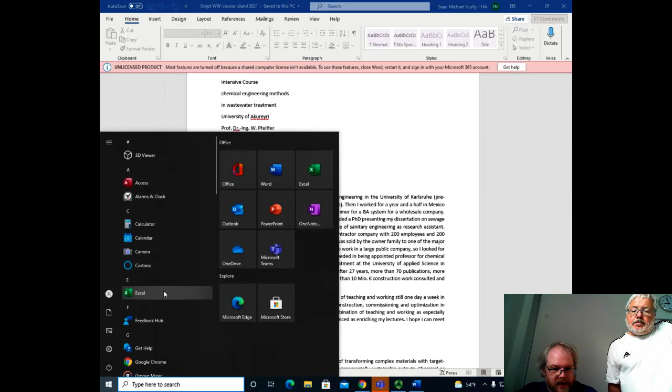There's no X on this one. There should be, yes. Okay, good. Wait, I did set the screen capture. Okay, yeah, excellent.

Good, so same deal as yesterday. Something on here, okay, we're gonna see some discussion then. Yeah, 262, it's the nice conference room. Nice, see you later.

No. I thought my computer was frozen. It's not there? No, it's fine. Okay. Whoops.

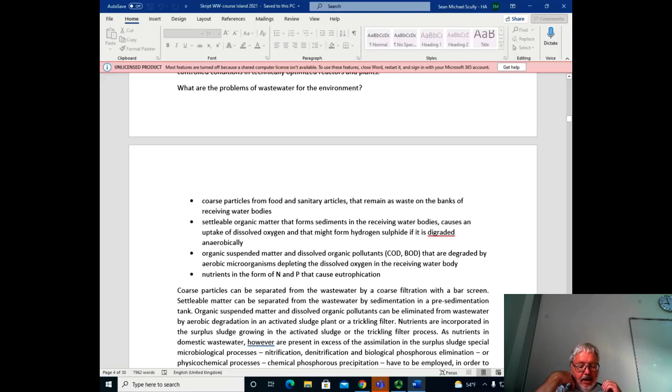Is that sound okay, or do you hear anything? Yeah, I checked the microphone earlier, it had a very good response. Ah okay, should be fine.

Well, do we have anybody with us? I think Celia's coming, and probably one other student coming around 9:30. I'm gonna see if there's anybody here online.

Oh, we got one victim online. Excellent.

So we shall wait some 10, 15 minutes, or? Yeah, maybe at least 5.

Let's check to make sure that this is... could you say something so I can hear, oh wait, I can even hear myself speaking, so it should be fine. Okay, yeah. Hello, hello. Yep, we're good.

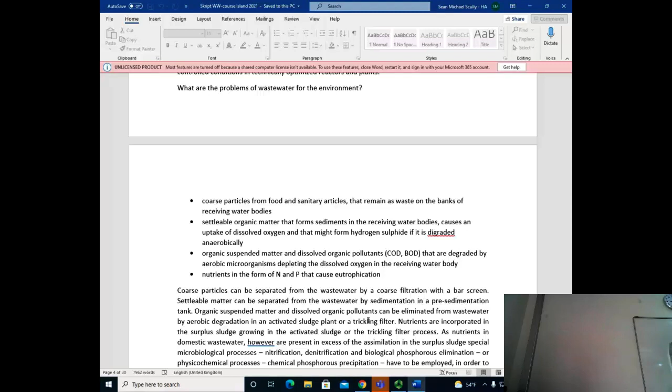Like I told you yesterday, chemical reactions can either be under forced reaction conditions, with high temperatures and pressures, giving all kinds of byproducts, but this biocatalyst human being is also very selective. So he eats food, all kinds of different food, from animals, from vegetables, all different resources, and the output is pretty uniform in quantity and quality.

This is what makes up domestic wastewater. We all wash ourselves, and we almost all use the same detergents. There was a change back in the 80s when we got away from phosphates for complexing the calcium, the hardness in the water. But that's probably the only change in the last 50 years. Everything else stayed the same, and we're all using close products, although we live in very different parts of the world.

Okay, now what is the problem? That was the last question yesterday. What is the problem, or what are the problems, for wastewater for the environment? Why don't you just discharge it?

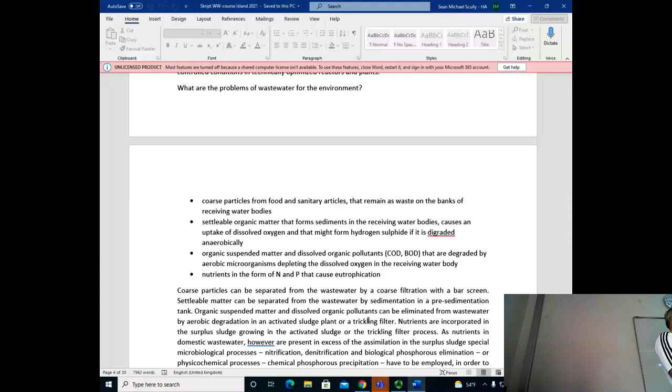I told you about Kaohsiung in Taiwan, a city with 1.5 million people at that time. It has almost doubled to 3 million people now. And at that time, the Love River, you could smell the wastewater. That's what you can do: you can just dump the wastewater in your rivers, and then just stay away from the rivers.

So wastewater treatment is a political decision. Do you want it, or do you don't want it? Because of course you can make drinking water—you can put the money into making dirty water into drinking water, or you can put the money into making wastewater decent, getting the pollution out and having clean rivers, and then it's of course a lot easier to make clean rivers into drinking water. Both options you have; that's a political decision.

Probably, I believe, but nobody has proved it up to now, that treating the wastewater and having clean rivers—besides that you can enjoy the nature, which I estimate as a high value—I think it's probably also more feasible to treat the wastewater and have less effort in producing drinking water.

But in the future, to be honest, this might change a little bit, because when the glaciers in the Himalaya are going to melt down, what are we going to do? There are 3 billion people living from that water.

I can imagine that, for example, in coastal areas they're flushing toilets with salt water. Why don't we use salt water for that? What's the reason to use sweet water for it? Maybe in 20 years, at least in coastal areas, our tap water is not going to be drinking water, it's going to be salt water. And maybe in every household you'll have a small unit of reverse osmosis, producing those 3 liters per person which you use for drinking and cooking, made through desalination. Might be an option, no?

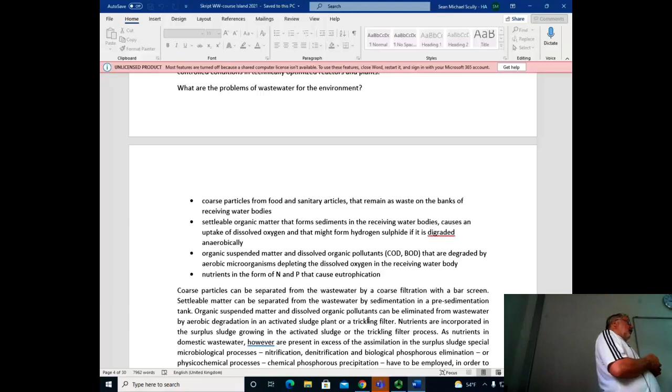Okay, just to tell you: this settled matter has also to be eliminated, because the dissolved oxygen content in the receiving water is really the main parameter we focus on in order to keep the receiving water in a good ecological state. Okay, what else do we have to do?

We have organic suspended and dissolved organic pollutants, which we measure with COD and BOD, because this is what happens when we release those in the receiving water. They will also deplete the dissolved oxygen content when they're degraded by aerobic microorganisms.

And last but not least, we have to deal with the nutrients, nitrogen and phosphate, because in our urine we have urea that will dissociate into ammonia and hydrocarbonate, and that's a source where most of the ammonia comes from. And then also in our feces and in our urine we have some phosphates. These are nutrients, and if those nutrients are in the receiving water and you have sun, you're going to have algae growth.

I mentioned that yesterday also. During the day it's fantastic because when you have algae growth, that means photosynthesis, so you produce oxygen, you will have oxygen saturation. But at night, when the sun is gone, these algae will be degraded by microorganisms, and then you will have respiration, and the dissolved oxygen content will be depleted, and your fishes will die during the night, and unfortunately they will not revive during the day. Because once dead is always dead.

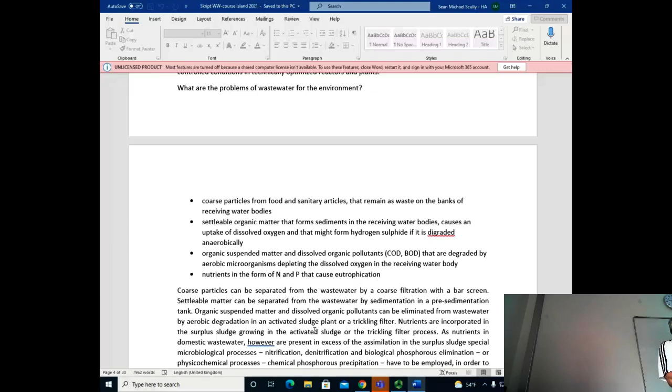And if that doesn't work, then you're in a very hard problem and very costly, and you have to think about thermal treatment or advanced oxidation processes.

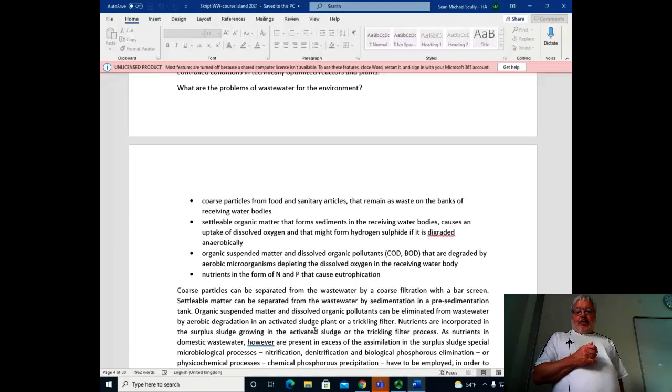Okay, now coarse particles can be separated from the wastewater by coarse filtration with a bar screen. Settleable matter can be separated from the wastewater by sedimentation in a pre-sedimentation tank. Organic suspended matter and dissolved organic pollutants can be eliminated from the wastewater by aerobic degradation in an activated sludge plant or in a trickling filter.

Nutrients are incorporated in the surplus sludge growing in the activated sludge or in the trickling filter process. As nutrients in domestic wastewater, however, are present in excess of the assimilation in the surplus sludge, special microbiological processes - nitrification, denitrification, and biological phosphorus elimination - or physical-chemical processes, chemical phosphorus precipitation, have to be employed in order to extensively eliminate nutrients from domestic wastewater.

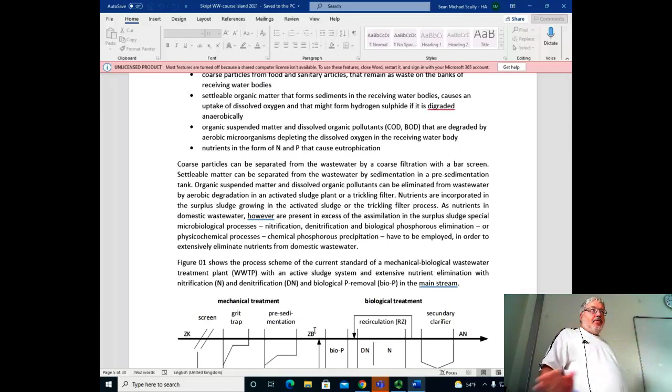This is a little bit the solution before we discuss how we come up to the solution. And now figure 1, which you see on the screen here, shows the process scheme of the current standard of a mechanical biological wastewater treatment plant with an activated sludge system and extensive nutrient elimination with nitrification, denitrification, and biological P removal in mainstream.

And you see first here, we have a screen, then we have a grit trap, then we have a pre-sedimentation, and then we have an anaerobic tank for biological phosphorus release. Then we have the denitrification tank. And in order to have any nitrate to denitrify, we have to have a recirculation of the nitrate which we form in the nitrification tank.

And finally, we have a secondary clarifier where we separate the microorganisms from the now treated water, and we have to recycle the sludge in order to decouple the hydraulic retention time and the SRT, the solid retention time. That means, because the microorganisms do not grow that fast, and that's good they don't grow that fast, because if they would grow that fast, we would drown in surplus sludge. And we don't want to drown in surplus sludge, so we have to keep the microorganisms in the system. That's why we have to separate them and recycle them, or we have to fix them on a carrier.

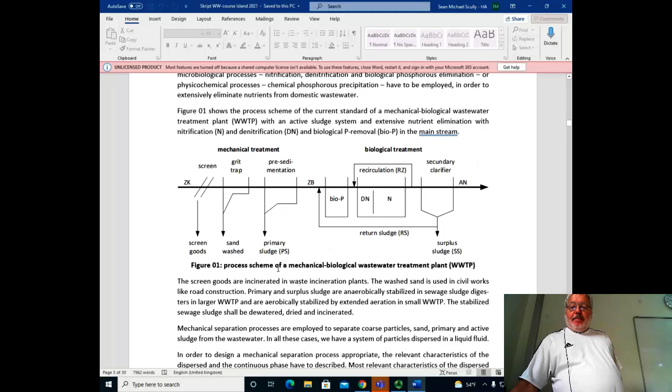This was all a little bit of a quick run, a very quick run. Now let's look at the things.

The screen goods are incinerated in waste incineration plants. The washed sand is used in civil works like road construction. Primary and surplus sludge are anaerobically stabilized in sewage sludge digesters in large treatment plants, and are aerobically stabilized in extended aeration in small wastewater treatment plants. The aerobic stabilization you might know from composting. You might use that for solid waste in your house.

The stabilized sewage sludge shall be dewatered, dried, and then incinerated, which is a sad story because we just have to incinerate it, as it's so contaminated with pharmaceuticals, and it used to be heavy metals. I think heavy metals we have pretty much under control, at least in Germany and other European countries and in North America, because we control our industry pretty strictly.

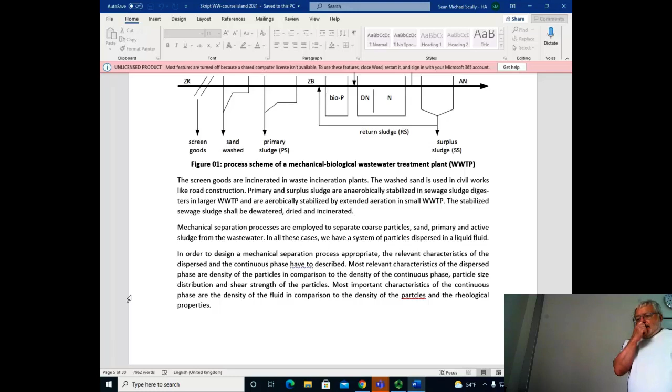This is the only way - incineration at high temperatures, controlled, is really a process where you really knock it down. It always comes up, to optimize the energy usage of that thing, and to go into pyrolysis. But I think whatever I heard of pyrolysis in the last 30, 40 years since I'm in business, there's no positive result out of that.

I was once in the Ukraine, in the southwestern part. There's a mountain range, they basically live off good water, which they sell especially to Arabian countries as bottled water, and they have a lot of wood. In the wood, they made a lot of charcoal. At Soviet times, there was an old big chemical combinate, also a big chemical factory.

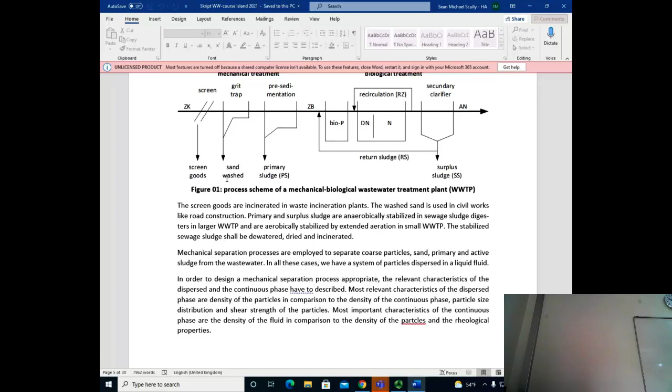So I asked them, do you need chemical conditioning? Because if you have an emulsion, you don't get to the fats unless you break the emulsion first, and then you need chemical conditioning with iron or aluminum salts in order to flotate the fats - or are they free fats? I wouldn't know, so that's the first question to answer. The second question is, if you put a DAF, what do you do with the sludge from the DAF? Do you have anywhere a biogas plant to digest it and get rid of that? Because if you have that stuff, what are you going to do with it? If you do not need any chemicals, you might be able to mix it into animal fodder or something, but if you have to add chemicals, you need a digester or something.

So that's the expensive part - the DAF is the easy part, you have to find the rest. This is why, at least, I'm being fair to tell you what happens with these effluents.

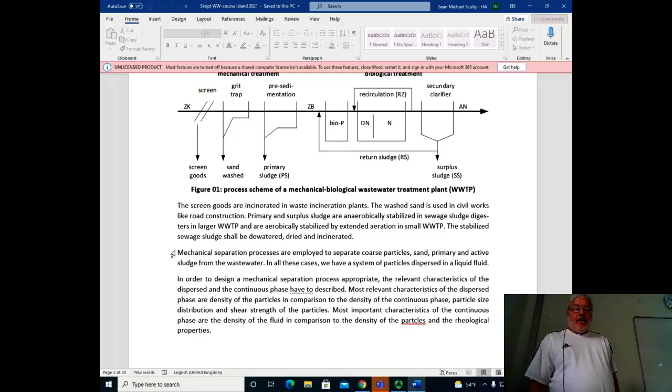But now let's get back to the processes, where I want to show you the methodology of cleaning. Mechanical separation processes are employed to separate coarse particles, sand, primary, and activated sludge from the wastewater. In all these cases, we have a system of particles dispersed in a liquid fluid, which is our water. Now, in order to design an appropriate mechanical separation process, the relevant characteristics of the dispersed and the continuous phase have to be described. Well, how do you do that?

I mean, depends on what you know. I mean, total solids, conductivity. What do you do with conductivity? I usually correlate it to total dissolved solids, TDS.

But conductivity has something to do with salts, and salts are in solution. That's ions, it's an ion concentration. Can you do anything with mechanical separation with ions which are in solution? God, no. So that's not really an interesting characteristic.

But what are interesting characteristics? Okay, skip that class, no? If you were in that class, you would have known separation processes. What unit processes can we apply?

There's not that many. What options do we have? Chopping, milling? No, you want to separate them. Filtration. Okay, you've got filtration, sedimentation. Okay, and that's it. There's no more. So you just have to decide between filtration or sedimentation.

In sedimentation, you still have two options, gravity or centrifugal. In centrifugal, you have two options, cyclones or centrifuge. I like to show that in trees, no?

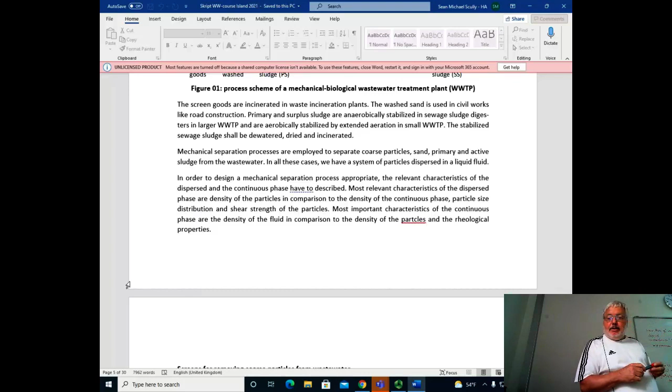But basically, in the coarse material, this is what you find in the text later. Just a minute, not to lose the thread, let me look at my text first and present that to finish this discussion. But you see, if you think by your own thinking, if you've learned this, you've all heard this before, this is nothing new, and this is something you can work with in your brain. You just have to have it present in order to use it as an engineer.

And this is how structured work is: we make a tree of our unit processes, and then we see what are the strengths of the options we have. It's totally right, filtration is always something you should think about when you have particles with high shear strength. You don't need to think about it if your dispersed phase has no shear strength. If you have flocs, you're just going to have a problem with filtration. Then you rather tend toward sedimentation.

When you have high difference in density, sedimentation is obviously an option, because you can have a high rate, using a low volume or small surface area sufficient for separating this. For sand and water, it will separate perfectly.

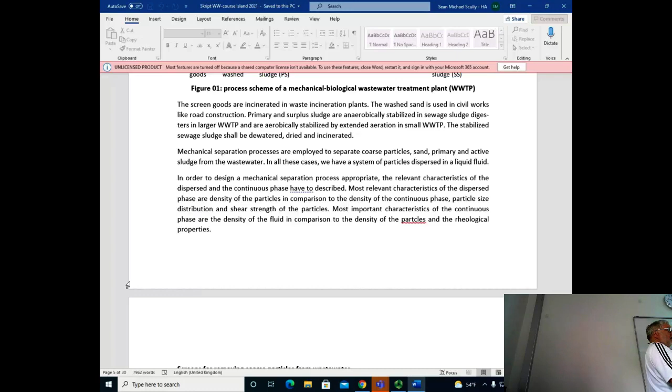Then in filtration, you don't want very small particles, because the filter is going to clog rather soon - it's going to be 'verstopft', clogged. It's going to clog very fast. Clogging is a problem of filtration, not a problem of sedimentation. So, just things you basically know. And if you have all particles of the same size, pretty uniform size, it's good for filtration.

If you have particles with a wide particle distribution, the small particles fill in the gaps between the big particles, and you get a filtration layer that's like a brick, so no water can go through it. That's not good for filtration.

So it's very easy to find those criteria, and then you just have to make a list of criteria and how important they are.

Morphologic box - that's the word we looked at yesterday. You can work with morphologic boxes because it has nothing to do with money, so you can't really quantify it, but you can say this has advantages or disadvantages. From those morphologic boxes, you can see which of the unit processes might be more appropriate.

And of course today, there's almost nothing that has not been done, so you can also look at what the experience is with these things. Okay, let's get back to the text here shortly.

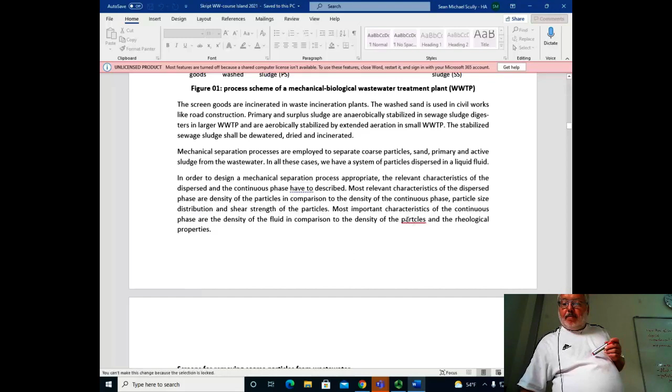No, I forgot an E here, and I forgot an I in my particles. No, okay, we can't do that. Never mind, I'll be back in 30 minutes. Okay, thank you very much. You got 3 people on Zoom.

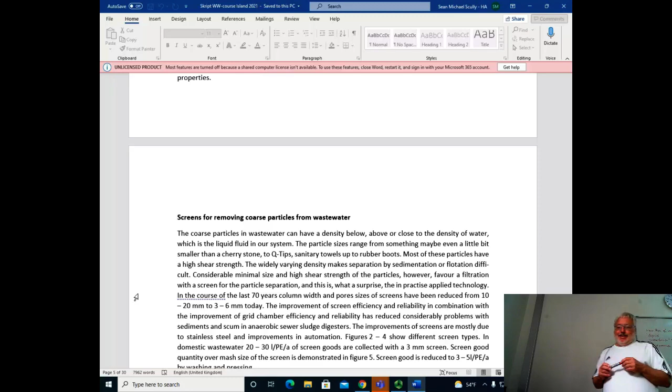Okay, and now you see the next thing we also worked out. This is what is written here on the whiteboard. And now we look at screens for removing the coarse particles from wastewater.

The coarse particles in wastewater can have a density below, above, or close to the density of water. We can have particles of styrofoam from packaging that got into the wastewater, or fat chunks or grease chunks, and these all have a density below or close to water, so they float or they might float up to the surface. And we have cherry pits and other things that have a higher density than water and will sink rather fast.

So sedimentation is excluded because we don't have a uniform difference of density, and that makes sedimentation not an easy process. We just need to have a difference in density in order to apply sedimentation.

If we had just particles with a density well below the density of water and well above the density of water, we could use sedimentation, and we could take the sludge from the ground of our sedimentation tank - those are the particles with higher density - and we can skim off the surface to take out the particles with lower density than water.

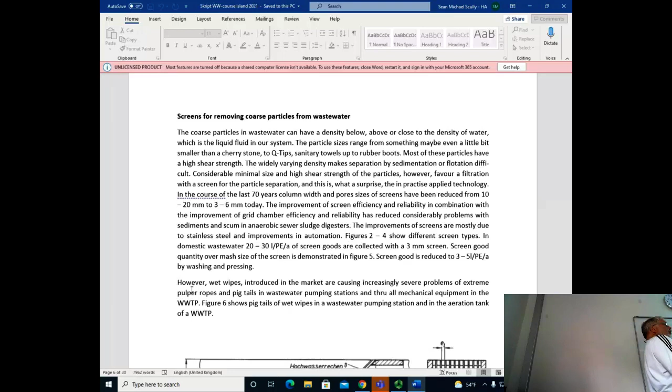Okay, let me tell you this now. Coarse particles in wastewater have a density below, above, and close to the density of water, which is the liquid fluid in our system. The particle size ranges from something maybe even a little bit smaller than a cherry stone, to Q-tips, sanitary towels, up to rubber boots. Sometimes it's incredible.

In Paris, there's a museum about the things they got out of the sewer system. Paris is a city with 9 million inhabitants, and they used to have one central wastewater treatment plant in Achères. There are 5 treatment plants next to each other with a capacity of 9 million PE. It's a real big wastewater treatment plant.

They have a sewer below the River Seine with a diameter of 3.50 meters, and they have a stone ball of also this diameter, and this is how they wash out all the sediments and the stuff that's settled in the channel. They roll this ball, or have it swum by water, through this huge round channel below the Seine, and then they take it out, and everything comes crushed out.

There are tours in the sewer system in Hamburg with a little boat that you can tour the sewer system in some parts. The old sewer system is all made out of brick stones, and they are almost as big, also 2 meters wide and 3 meters high. So it's easy, sitting in a boat, to tour these sewer channels.

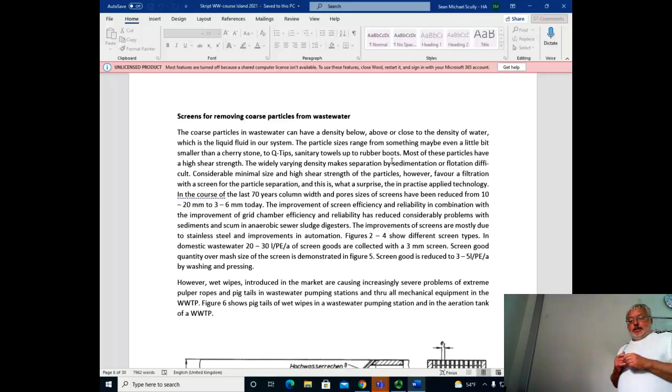There are rubber boots, so you have, this is just a normal thing. You find those in almost all kinds of cities, as shoes and all this kind of stuff. Entire clothes, coats, hats, and whatever - you find all this. This is the big parts. There's not much of it, but it's there.

Most of it is, of course, all this sanitary products, small plastic parts. From food, of course, you have some leftovers. If you make a salad, the ends of your carrots or leaves might end up there. When you cook a soup and there's some rest of the soup, well, what do you do with it? You can't put it in the solid waste because it's too liquid, so most people will put it in the toilet and flush it away. This, of course, you will find later in the sewer, and this is what you have to separate. This is what it is when you talk about coarse material - just watch yourself, what you do in your household.

Most of these particles have a high shear strength. The widely varied density makes separation by sedimentation or flotation difficult. Considerable minimal size and high shear strength of the particles, however, favor filtration with a screen for particle separation. And this is, what a surprise, the technology applied in practice.

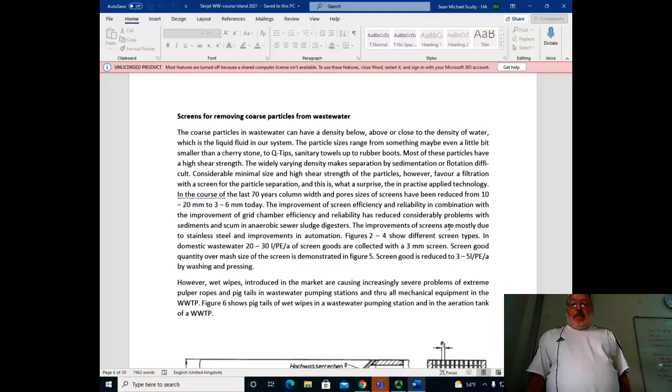The improvement of screens is mostly due to stainless steel, because stainless steel is something fantastic. Before, screens were made out of mild steel, and corrosion was a significant problem - any screen not made out of stainless steel would corrode within 3 or 4 years. Stainless steel screens will last at least 10 to 15 years, so that's a considerable difference. We also have much more precise production of grids, and a lot of improvements in automation of screens, so we can clear the screens more frequently without problems.

Okay, in figures 2 to 4, we show different screen types used in domestic wastewater.

20 to 30 liters per person per year are the screen goods, which are collected with a 3 millimeter screen. The screen good quantity depends on mesh size, and the screen is demonstrated in figure 5 — I'm going to show you that.

The screen good is reduced to 3 to 5 liters per population equivalent per year by washing and pressing. Washing and pressing became popular starting in the 1980s, more or less, and now it's standard.

When I came shortly after unification to the treatment plant of Wismar, we still didn't have washing and pressing of our screen goods, and I can tell you that's the most ugly thing you can have, because it really stinks, and you have the pure feces in your screen good.

Now, we wash it with pressurized water, so all the fecal components are washed out, and then it's...

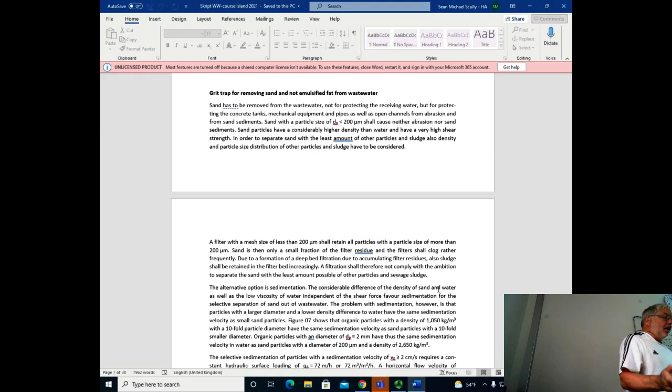Because I unfortunately will need this word more times, let me open my dictionary. I'll come back — I think it's a shaft.

In the shaft, they will collect the stones and manually take them out of the shafts, then transport it to the treatment plant, wash it, and give it to the construction industry, as they use it as gravel.

Just a second. Okay, on the internet, let me just open my dictionary so I can give you all the words. Okay, got it here.

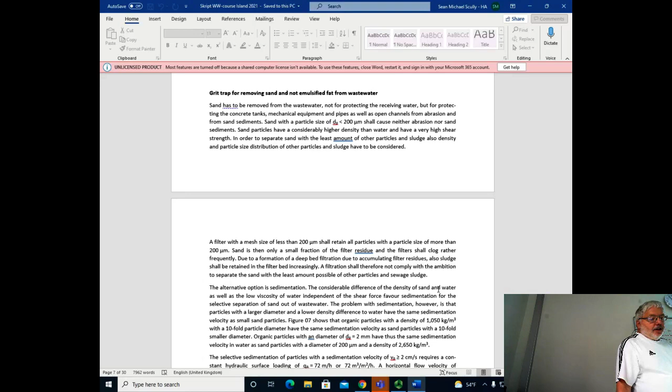Shaft, yeah — it's a shaft. It's a vertical tunnel or chamber, and in a normal gravity sewer, you have one every 80 to 100 meters. Then the horizontal sewer...

...has an inclination anywhere between 0.5 to 1%. There you just have this hydraulic broom, and there they get the sediments out. This is where sand particles of more than 3 millimeters collect — in the sewer system, not reaching your wastewater treatment plant.

In the wastewater treatment plant, the particle size of sand is mostly such that anything greater than 3 millimeters will anyway be eliminated by the screen. So it's below 3 millimeters, going down to almost 10 microns or so.

Now, you design all your hydraulic systems in a wastewater treatment plant so that any sand particle of less than 200 microns, 0.2 millimeters diameter, will be suspended or kept in suspension due to the flow velocity, stirring, or hydraulic conditions.

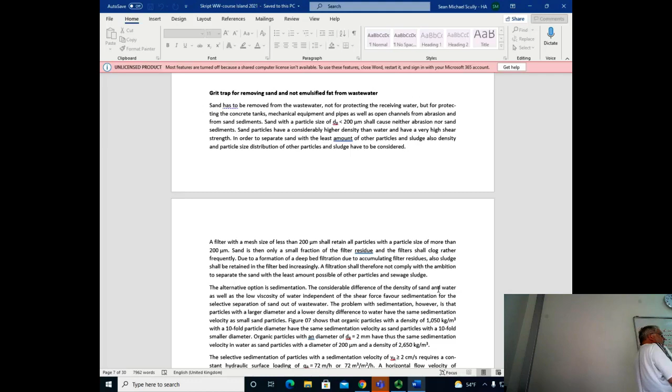So for this sand, we have to separate organic particles from sand that have the same sinking velocity as sand with 200 microns. The question is, how big are these organic particles?

The sinking velocity is proportional to dp squared times delta density — so we need to look at the Stokes equation. Just give me a chance not to do anything wrong here.

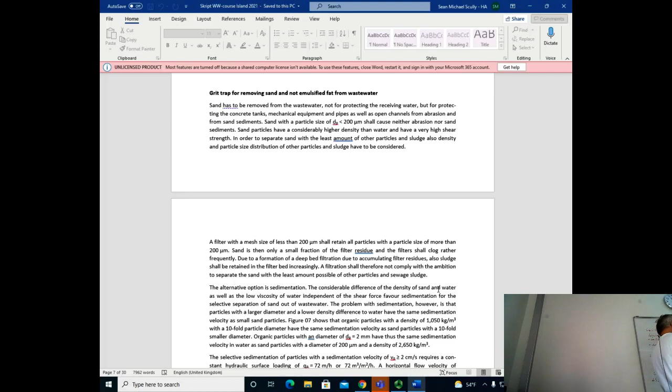So we see in between here we have a factor of 17. And of course V, Stokes, the result is that V is proportional to d squared, and V is also proportional to delta density. So this results in a diameter of about 4. So if you have an organic particle about 4 times the size of the sand particle, it will have the same sedimentation velocity in water according to Stokes.

This is what I think I might have, let me see here. Yes, I have it in here. This is also displayed in this diagram. Here you have the different sinking velocities over the particle size, and as a parameter you have the density. Here again you have the sinking velocity in meters per hour, and here you have it in centimeters per second.

So this is our 200 micron sand particle, and this is meeting here the density that should be of 2.7 or somewhere. Let me make it a little bit bigger here.

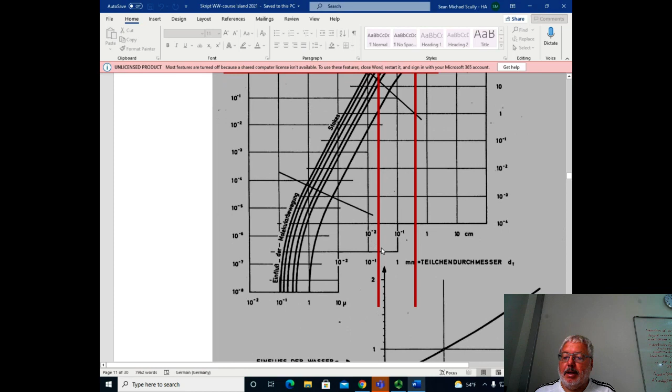I don't actually know why this isn't over here, because it should be, it really should be on the outer line. I don't know why I did this here. I think these things have been moved because they should be a little bit more up here, because it doesn't make sense. Let me see this on the original, just give me a second here.

No, my computer, sorry, I probably handed this in. This must have moved without myself realizing that. I don't know what I changed here. Of course, this intersection, this line should go up to the intersection with this density of 2.65.

And then we have a sinking velocity of these particles of about 2 centimeters per second. And then the organic particles that will have the same sinking velocity, you'll find out when this meets here, this is meeting this density, but this is only 1.05, so this is a smaller density difference, and then you'll find out that the particle difference is a factor of 10.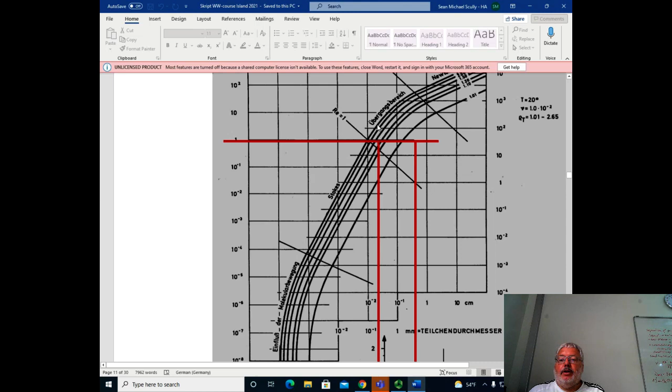Okay, what I want to show you - although I don't know, Sean, this red should be... I don't know, it moved, no? Oh, did it? Yeah, this should be up here to cross here. I don't know, it's my fault. It's on my original as well. So we might - you have, I think, a Word version that you can put it up here and save it again as PDF, no? Would you put the cursor right back where it is? I'm going to take a reference photo just so I don't mess it up - just up to the upper curve here. This should be the intersection, no?

Yeah, because when you look in here, this is the density of sand, and this should be sand, and then the organic will also move up to 1.1, which I did calculate here. So that should really make a difference of a factor of 4. Now, this is the Stokes equation - I had to look it up as well, I didn't know it by heart. But then you find this: the potential is 1, and this is 2, no? And so you have the density difference as a factor of 17 or so, and then you come up with a factor of 4.

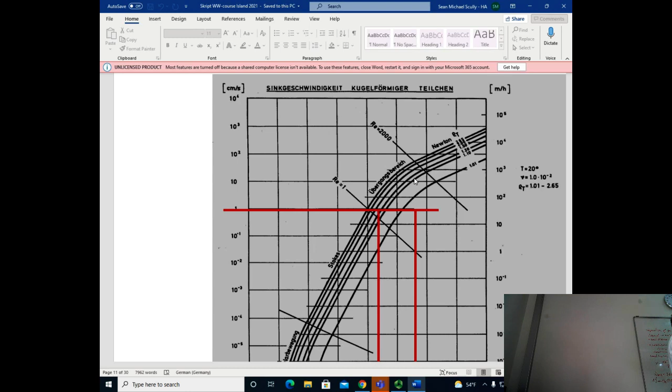Just a practical question: when you're doing these sand separations and you cycle it so many times, does the sand break down and form smaller and smaller particles? No, it doesn't. Sand is hard enough. To grind sand, you need - not by washing - you really need a solid grinding system. So this doesn't make any difference, not even with sand on sand. By this pure washing, you can't really measure that.

Okay, what I gave you here is also - let's first go to the text so I don't forget things here.

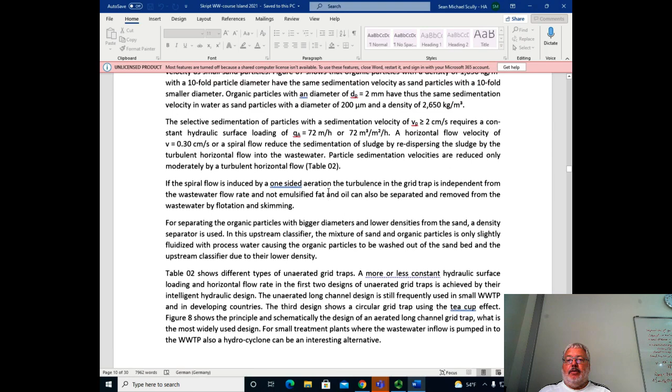Sand with a particle size smaller than 200 micrometers shall cause neither abrasion nor sand sediments. This is why we have this criteria for separation. Sand particles have a considerably higher density than water and a very high shear strength. In order to separate sand with the least amount of other particles and sludge, also density and particle size distribution of other particles and sludge have to be considered.

This is what we have seen. So a filter with a mesh size of less than 200 micrometers shall retain all particles with a particle size of more than 200 micrometers. Sand is then only a small fraction of the filter residue, and the filter shall clog rather frequently. Due to formation of a deep bed filtration from accumulating filter residue, sludge shall also be retained in the filter bed increasingly. There are two systems you can use for filtration.

There's a filtration where the filter media just retains the solids on the surface, and then you might have a filter media more like a sponge. This is what we call a deep bed filter, because there the filtration takes place within the filter bed. This is basically used when you want fine filtration in the effluent of a wastewater treatment plant, and more frequently it's used for separating ferrous hydroxide flocs in water purification processes.

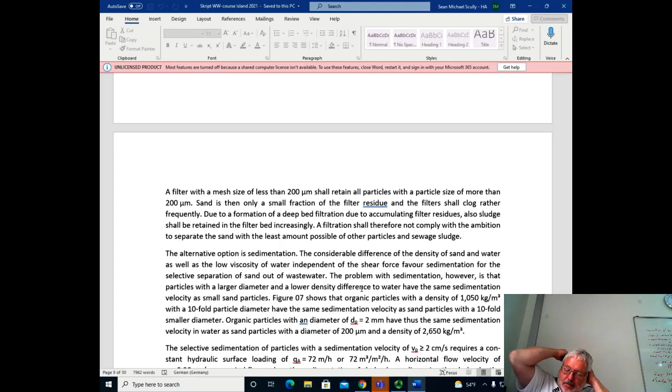My microphone here, let me put it back. Okay, now put the microphone back. It was sitting on the cable here.

Okay, sorry. The alternative option is sedimentation. The considerable difference in density between sand and water, as well as the low viscosity of water independent of shear force, favor sedimentation for the selective separation of sand out of wastewater.

The problem with sedimentation, however, is that particles with a larger diameter and a lower density difference to water have the same sedimentation velocity as sand particles. We treated that here explicitly. Figure 7, which I showed you, shows organic particles with a density of 1,050 kilograms per cubic meter with a 10-fold particle size. They may have the same sedimentation velocity as sand particles with a 10-fold smaller diameter. Organic particles with a diameter of 2 millimeters thus have the same sedimentation velocity in water as sand particles with 200 microns and a density of 2,650 kilograms per cubic meter.

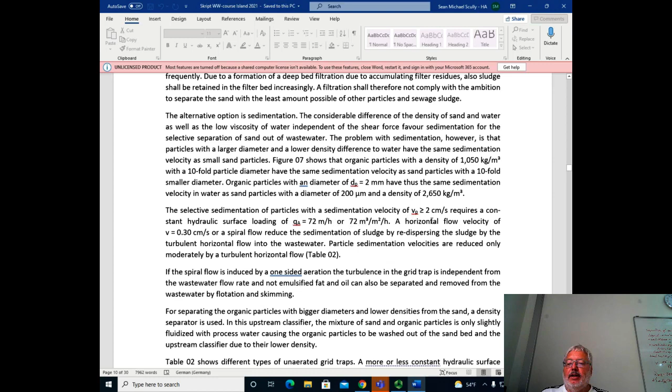Okay, the selective sedimentation of particles with a sedimentation velocity of 2 centimeters per second. This is 2 centimeters per second. If we go up here, this is about where it is, it's one third, so about here. Theoretically it should be 5, but we apply 2 because this has to do with the turbulences in our system, so we don't have a dormant or stationary liquid, but it moves, so we have to lower our surface loading a little bit.

Hydraulic surface loading, in order to still have a safe sedimentation. So if we apply sedimentation, or calculate the sedimentation velocity of 2 centimeters per second, rather this is really our surface loading, and the particle settling velocity has to be greater than this 2 centimeters per second.

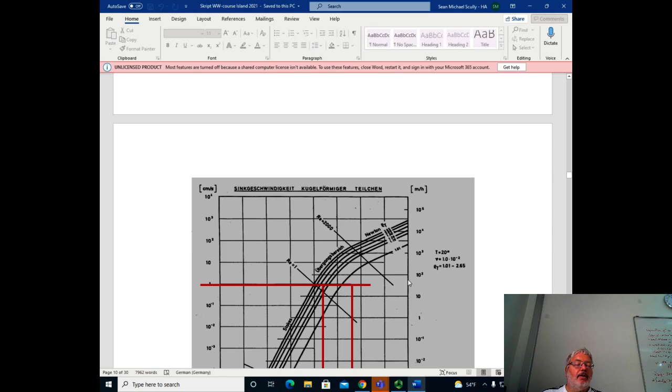Then we have a constant hydraulic surface loading of 72 meters per hour, which you can also see here. Here you have 100 meters, so 2 centimeters, a little bit below. That's our surface loading, our hydraulic surface loading, which means it's 72 cubic meters of water passing through 1 square meter of surface per hour.

This is the hydraulic surface loading, and this is the velocity the water goes upstream if you were to have a vertical sedimentation system. By calculation, you can prove this also applies for a horizontal sedimentation system. A horizontal flow velocity of 0.30 centimeters per second, or a spiral flow, reduces sedimentation of sludge by redispersing the sludge through turbulent horizontal flow into the wastewater.

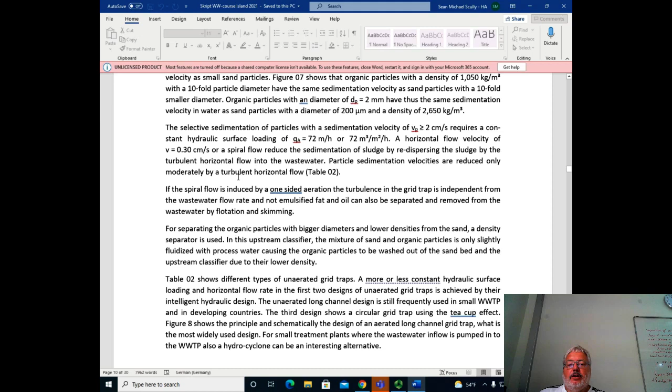Particle sedimentation velocity is reduced only moderately by the horizontal flow. That's why, if you move this up here, you end up with 5 or 7 centimeters, but we are reduced to 2 centimeters. This has something to do with the table.

Here you see the diameter of the sand grain, this is what we want to separate here, 0.2 millimeters. And the sinking velocity ideally is 2.3 centimeters per second.

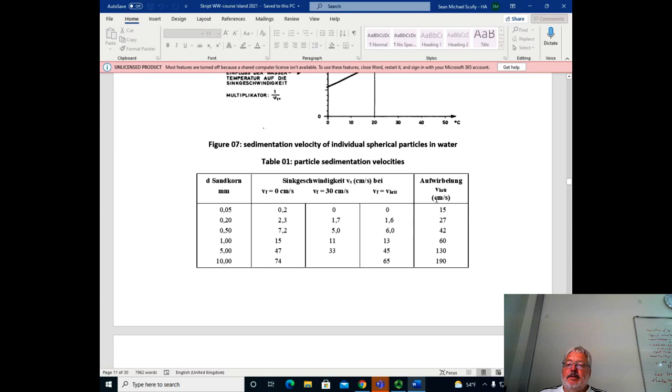But if you have a velocity of 30 centimeters per second, you're down to 1.7. And you shouldn't have more than 27 centimeters per second flow, because then you get a re-immersion of your sand particles. So this is really a finely tuned system.

You have to control everything to the right magnitude.

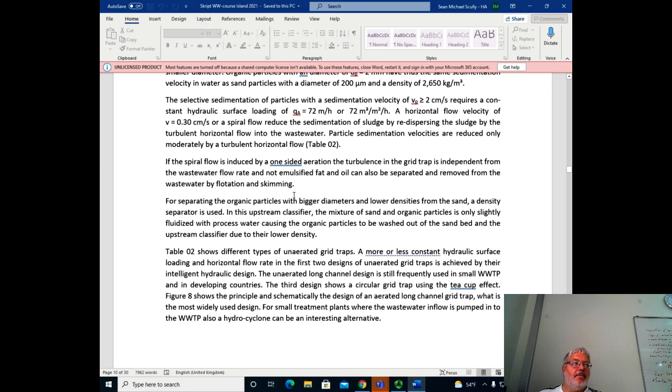If the spiral flow is induced by one-sided aeration, the turbulence in the grit trap is independent from the wastewater flow rate, and not emulsified fat and oil can also be separated and removed from the water by flotation and skimming. You're going to see that.

This is today's modern type of long channel aerated grit chamber. When you aerate it here, you get a circular flow if you do not have any vertical or horizontal flow here, meaning if you have no inflow into your grit chamber.

If you have an inflow in your grit chamber, the water flows in this direction, and due to the aeration, it's moved in a spiral form through this grit chamber. The spiral gets longer if you have more flow, and it turns on the spot if you have no flow. This circulation keeps the sludge immersed, allowing the sand to separate.

For separating the organic particles with bigger diameters and lower densities from the sand, a density separator is used. In this upstream classifier, this is what I called density fluid separation systems—they're really called upstream classifiers.

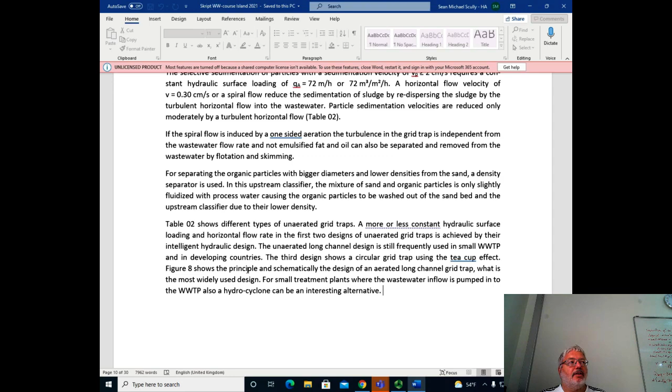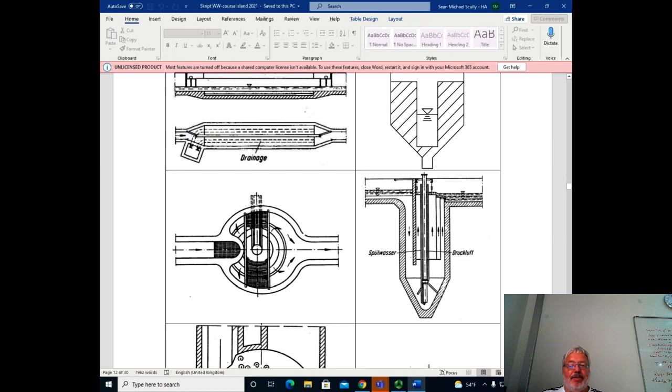Also kind of a nice thing if you don't have electronics to regulate things, and this was done before electronics was invented.

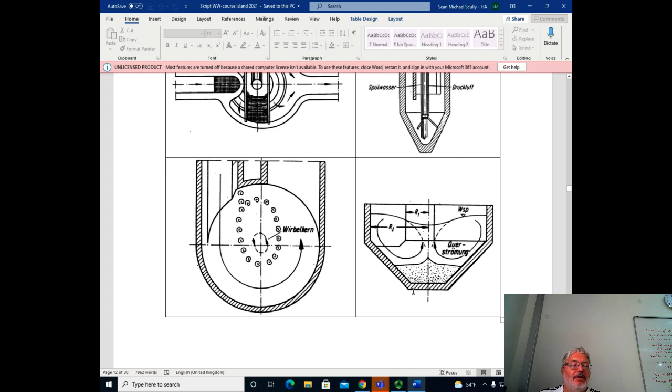Okay, this is the circular thing. I found this a lot in Russia and East German countries. They prefer the circular, and this is like a teacup effect. If you stir a teacup, you will find that the tea leaves are going to collect in the center. This has something to do with when you stir, you have centrifugal forces. The centrifugal forces will cause the water level to rise at the rim, and this will induce a current that will flow to the center, and this is how the tea leaves are moved to the center of the cup.

Okay, we don't want to bother with that, it's just because it's nice. You can calculate it, and they work. All of them have been applied, have been working.

But this is now the modern design that we generally use. We have a mechanic scraper, or we suction it like your Hoover - Hoover is a word, you use your Hoover in your house, you do the same thing here. You have a pump and you just suck away the sand, or in the center you have a screw conveyor. Although with a screw conveyor, you have to be a little bit careful, you need to have plastic below the screw so the sand doesn't abrade it too fast. That's always a little bit nifty to get working.

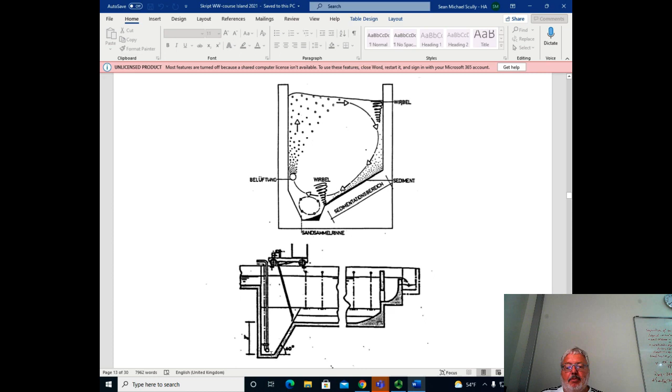And then you have a pump where you pump water and sand away. It needs to be a heavy duty pump, safe for erosion. This is a scraper, and here you have the Hoover system, where you suck away the water with a pump here.

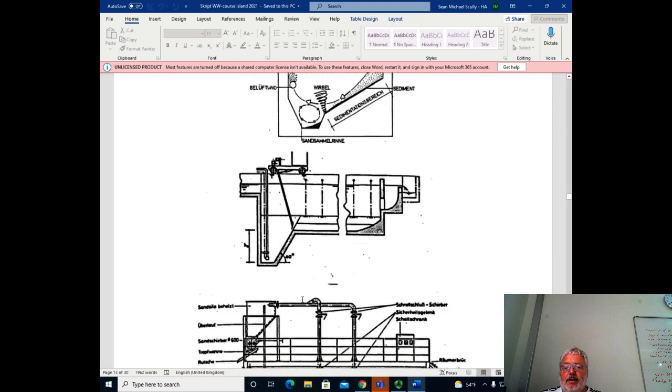Okay, this all has to do with sand removal. So for the large particles with good shear strength, we use a filtration system in the form of a screen. And for sand, fats and oils, we use sedimentation with a pretty high load.

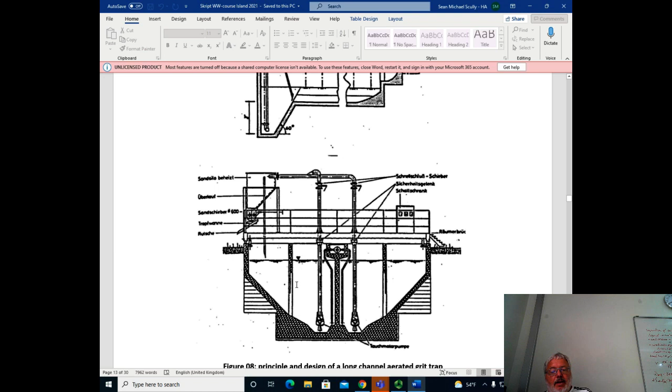What I forgot to show you is this is where we collect the grease. It's like a fence with wooden plates and holes in between, or concrete holes. Due to the current velocity here, the grease will go through, float up in this chamber, and you can skim it away with a scraper, then pump it to the digester.

So I imagine clogging in those types of systems where you're skimming off fats, oils and grease, they're prone to clogging, right? Do you have to heat those?

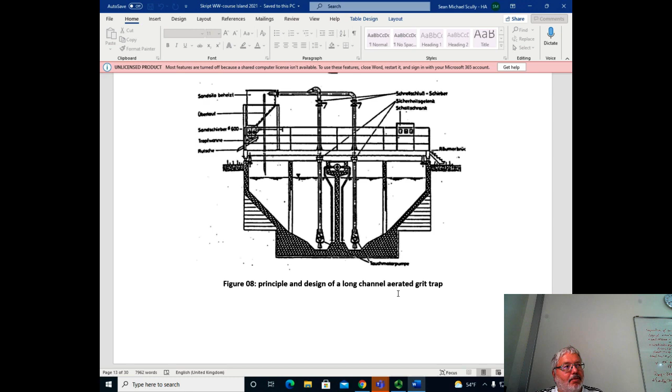No, because you skim off a layer and you have a bunch of water with it. When you skim it, you always skim it over a rim, and then it falls down 30, 40 centimeters, and the layer of fat is not sufficiently stable to survive this fall with the water. You probably never have more than 50% solid grease and fat in there. That gives you sufficient COD concentration for the digester, so you can dilute it 1:1, no problem, and then it's easy to pump.

This removal of grease from grease traps in industry, where water, for example from the milk industry, passes through a tank, you get a layer of 30, 40 centimeters of solid grease. When the guy comes to take it away, he has to destroy it first. He goes with his equipment, with hoses of 150 millimeters diameter.

It has an end of steel that's pretty heavy, and he has something like a crane. He destroys the scum layer first, then pumps it forth and back a few times, breaking it into pieces small enough to suck away with all the water. Normally, if he has a 30 centimeter layer with a 1 meter diameter, he pumps everything away because he gets paid by volume.

He doesn't care, so he pumps it. He always empties it, because on the bottom you also have some sludge. He takes everything, otherwise he wouldn't get paid for his work.

Okay, now we have two more mechanical systems to go, and then we'll move to the biological system. If we come back, we had coarse material we wanted to remove, which we did by filtration. Then we wanted sand and fats removed, which we did by sedimentation with a pretty high surface loading.

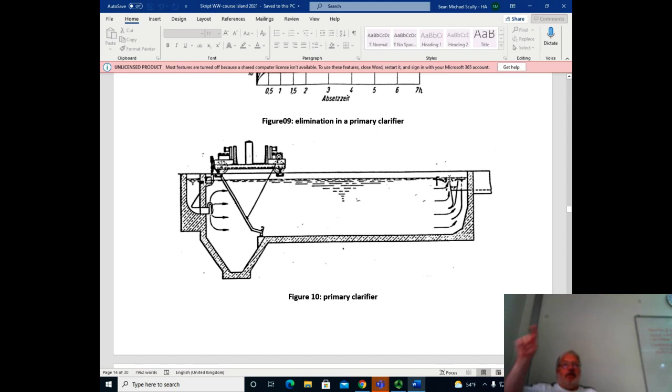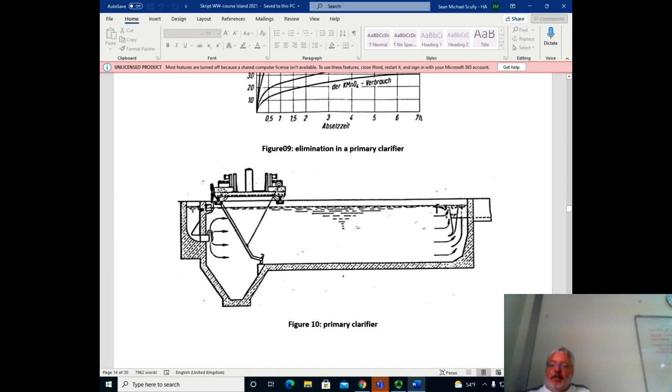Then you have a weir, you know, how do you say this... I had this, sorry. The effluent, no. Well, you have a weir with cut-ins for the effluent, because the effluent weir is kind of important. I'll come back to that.

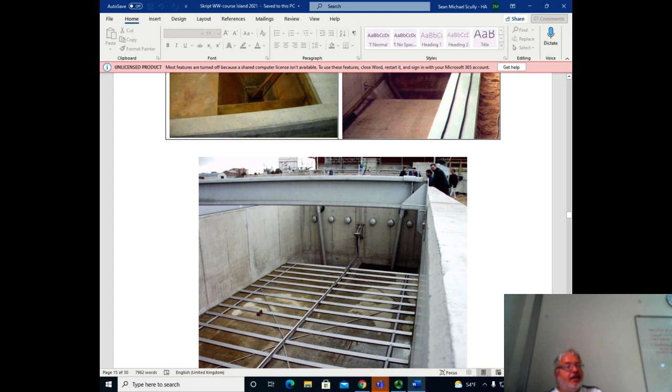Here in the picture you see the pit, and the baffle inflows. This is a special scraper developed in a Scandinavian country - it has an eccentrical move, forth and back, with a steep incline in front and a smooth incline at the back. Moving back, it slides underneath the sludge, and moving forward, it pushes the sludge into the pit. From the pit, it's sucked with pumps, or you have a hydraulic system, since it's deep, with water pressure pushing it into a shaft on the other side, where submersible pumps pump the sludge into the digester. This is normally how the systems look.

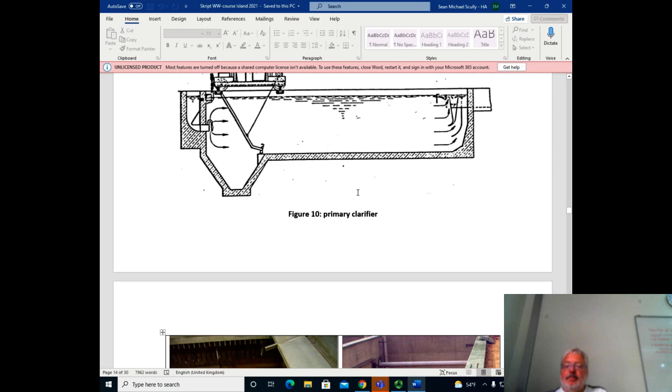This photo is from the pre-sedimentation tank in Stavenhagen, another plant. This is the efficiency data - after 2 hours, you've eliminated all the settleable matter, meaning about 70 to 72% of suspended solids, since suspended solids are the settleable solids plus the others eliminated by filtration. Filtration here is very finely defined, by 0.45 micrometer pore size, which is normally difficult to measure because the filter always clogs - it's a pain to measure.

Then here's BOD, which is pretty much the same. The COD is eliminated by about 30% more or less. This is an old unit - this COD is on the base of permanganate, which is old. It's from my professor, I took it from the textbook of my professor, where I did my PhD.

Okay, let's go through the text. It's not much, so I don't forget anything.

Primary and surplus sludge are not composed of particles, but rather of flocs. The flocs are shear sensitive, and the density difference to water is small, so the flocs have neither a well-defined diameter nor a well-defined form. For sludge parameters, laboratory tests were developed that describe the sedimentation of different sludges quite well. The parameters developed are the volume of settled matter, total suspended solids, and the sludge volume index - but the sludge volume index will come back at secondary sedimentation, where it's more important.

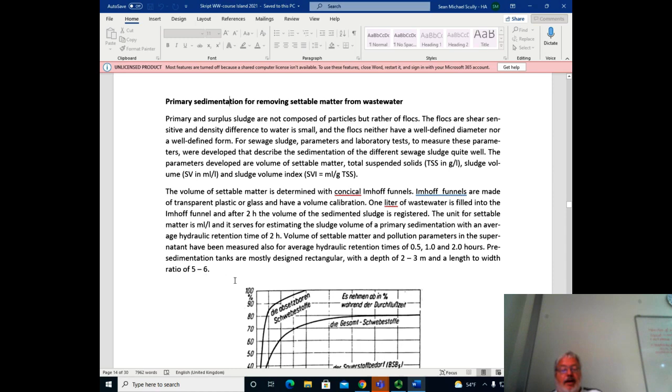This is what I already told you. Then we looked at the things here, and we'll see. Total suspended solids are all particles that do not pass a filter with a pore size of 0.45 micrometers, or 450 nanometers.

So 0.45 micrometer filters clog often before a volume of 100 milliliters is filtered, so for filtration we don't even have to consider that, unless the content of TSS in the sample is very low, as for example in wastewater effluent. Often normal paper filters are used to measure TSS, which is not correct. But what are you going to do? You find a solution. If you see that your filtrate is optically clear, that's all you want, that's what you do.

I was about to ask, what type of membrane material do you use industrially for 0.45 micron? What are your options, like nylon, Teflon? You can buy them, I don't know exactly what the material is. Or the option is glass fiber, but that's more or less also very fine, and it works a little bit more robust than the membrane filters you can buy, but I don't know what material they have.

But those membrane filters are a pain. I get so frustrated. I bought a couple square meters of both Teflon and nylon 0.22 micron membranes, and I'm constantly backwashing them. Oh no, this is just for analysis - you use 100 milliliters, and it's really annoying, you have to screw them together and you never get them really fixed. It runs all over the place with water. It's just a mess, by suction it's just a mess.

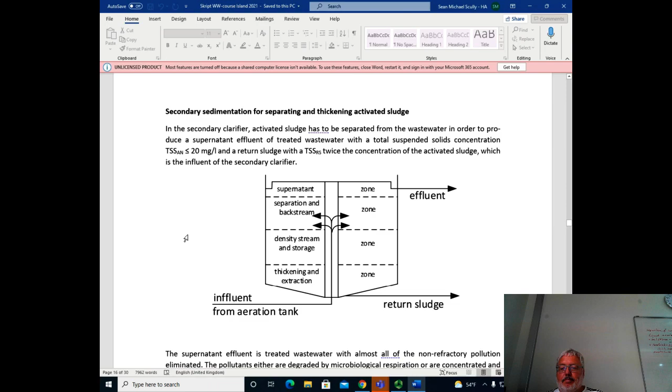Good, yeah, the secondary clarifier, that's a little bit longer. And then we come to the biological reactor. So I might need half an hour to terminate the mechanical stuff. No worries.

In the afternoon I have Violetta as a student, if she finds the university. Yeah, it should be easy to find, but that's what I did - when I first moved here, I did get lost trying to find things. I've got a class from 1:30 to 2:30, then I suspect we'll have more students. Thursday was a pretty busy day for the students, so a lot of them are jumping between morning lectures. This one we have to take, or is it in every room? This one is in every room. Leave it here? Yeah, just leave it here, that's fine. Okay, and I'll just take my stuff.